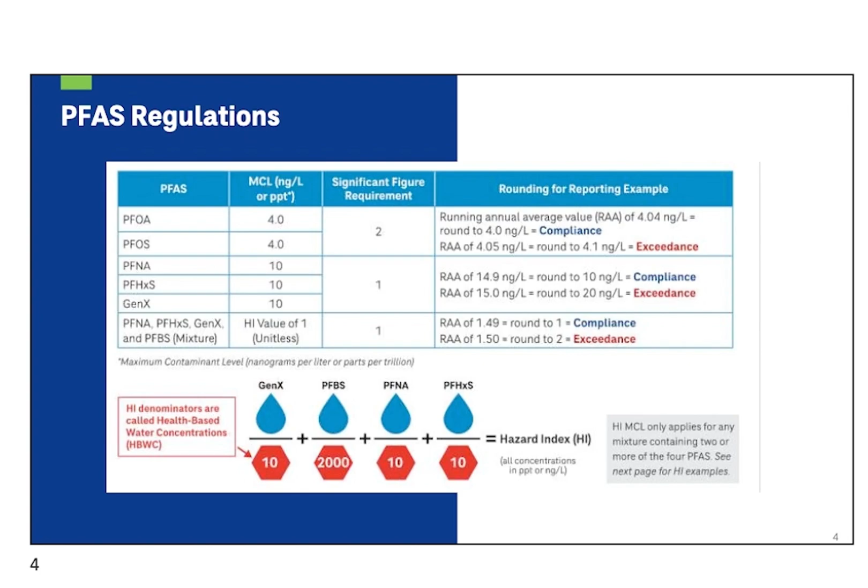So it's quite different. And then they also have a hazard index, which is explained in the figure at the bottom of the slide, where they take the concentrations of 4 compounds and divide them by their health-based water concentrations and add them up, and that has to be less than a value of 1. The significance of that is they're going to keep adding compounds in the future. So you can expect that in 20 years from now, there'll be quite a few more of these PFAS compounds regulated by adding them to this hazard index.

But for right now, the most restrictive aspect of this regulation for you is PFOA and PFOS, as we'll show in just a minute. Next slide. So this is your data for raw water, untreated water, before you've added any powdered carbon. You all do take out some of the PFAS already by adding some powdered carbon.

But your raw water, as shown both graphically on the right and with numbers on the left, exceeds the limits that will be effective in 2029. So you're not exceeding anything right now, but in 2029, you have to get down below 4 for PFOA and 4 for PFOS, whereas they're currently at 10.2 for PFOA and 26.1 for PFOS in the untreated water. And you can see that graphically on the right.

The limit of 4 is shown with the green dashed line, and the bars going up are your concentrations. The upper graph is for PFOS in nanogram per liter. And you can see it hovers around 20 to 30 nanogram per liter for PFOS in your source water, whereas it hovers around 10 to 12 for PFOA. So you need treatment. Next slide.

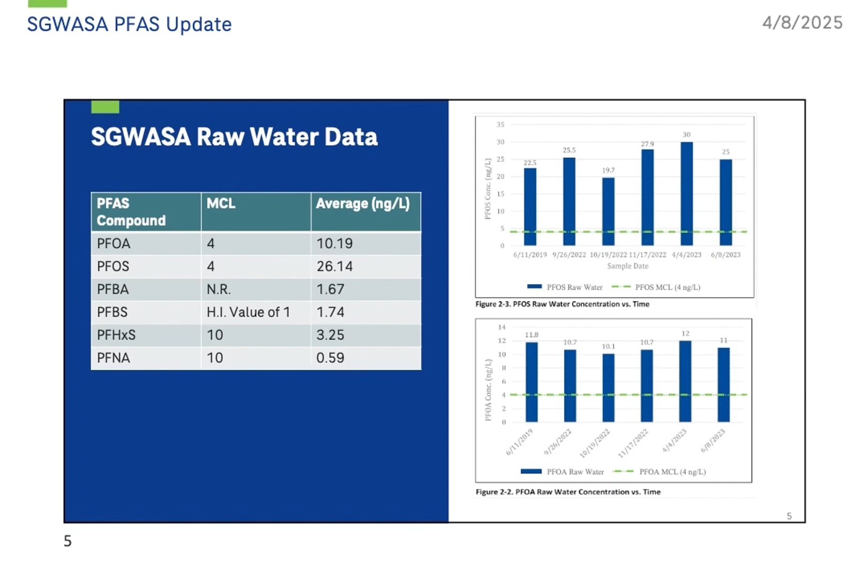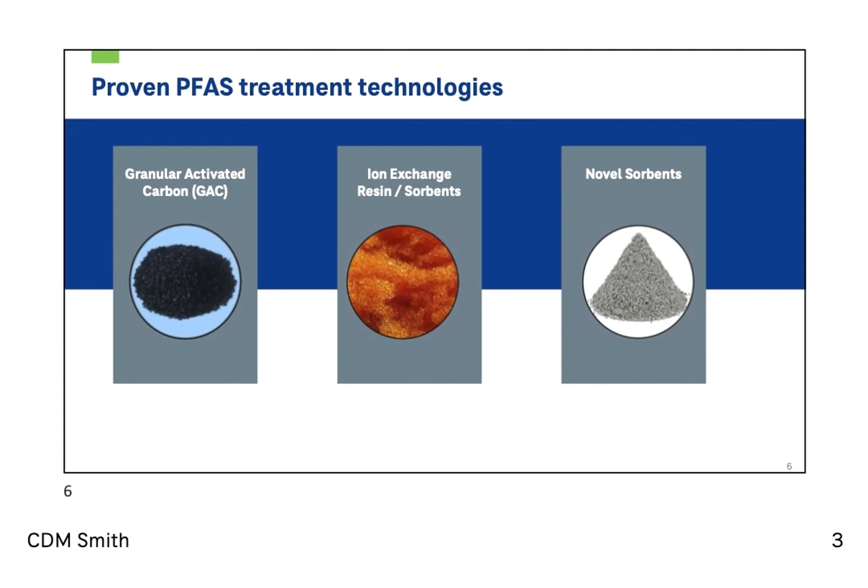So what treatment technologies work? Well, granular activated carbon does work. You already add some powdered activated carbon to your raw water. Granular activated carbon after your filters would work quite well. Some plants have that already, as I'll discuss in a moment. But granular activated carbon could be added at your plant with post-filter contactors. And that is what we're pilot testing right now.

We are also pilot testing ion exchange because that can work and sometimes be more effective, particularly for short-chain compounds. So we'll compare those when we get enough pilot data to make conclusions. We're also looking at novel sorbents, which are fairly recent, hence the name novel, discoveries of ways to remove PFAS compounds. The novel sorbents work pretty well for the long-chain PFOS and PFOA, not so well for the short chain. So we'll summarize all that in the report and make recommendations and compare them in many ways, including costs.

We cannot compare O&M operating costs right now because we don't know how long they will last. That's what the pilot testing tells you. How long will it last? Next slide.

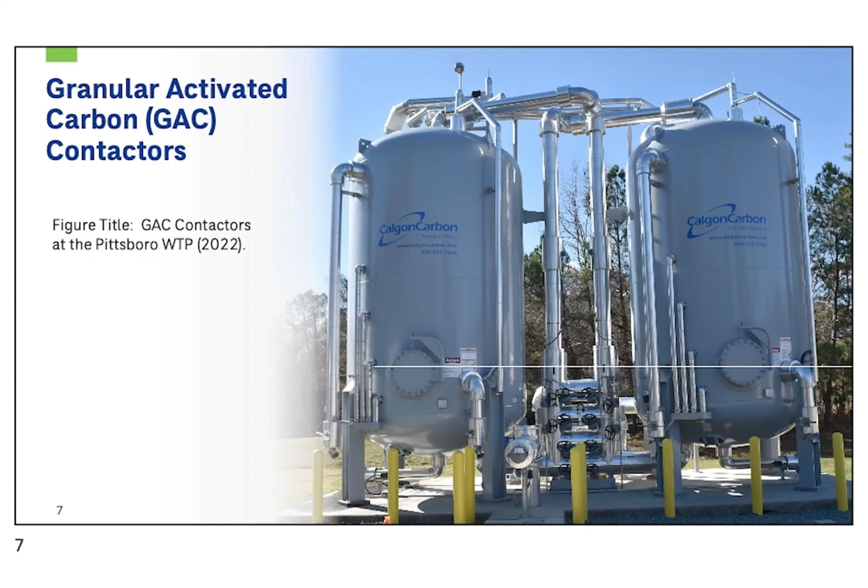So at Pittsboro, as an example, I mentioned that some plants in North Carolina already have this technology. Pittsboro had high levels, like many in the Cape Fear Basin, high levels of PFAS. So we already designed, built, implemented these GAC contactors that you see. These are in operation, and we did the design and construction and startup operations, and it's working very well. These are with GAC, but we designed these where they can actually work with ion exchange and novel sorbents also. It's the way you design the internals of the contactor.

Can I ask a question? Yes, sir. What are their current numbers? Oh, they can meet the 4 and 4 right now. Good question. Yes, what is their daily output of water compared to ours? Yeah, so Pittsboro averages about 1 MGD. If you want one that's larger, Wilmington, way down at the end of the Cape Fear Basin, they're doing post-filter GAC, and they're a larger plant. Thank you. You're welcome.

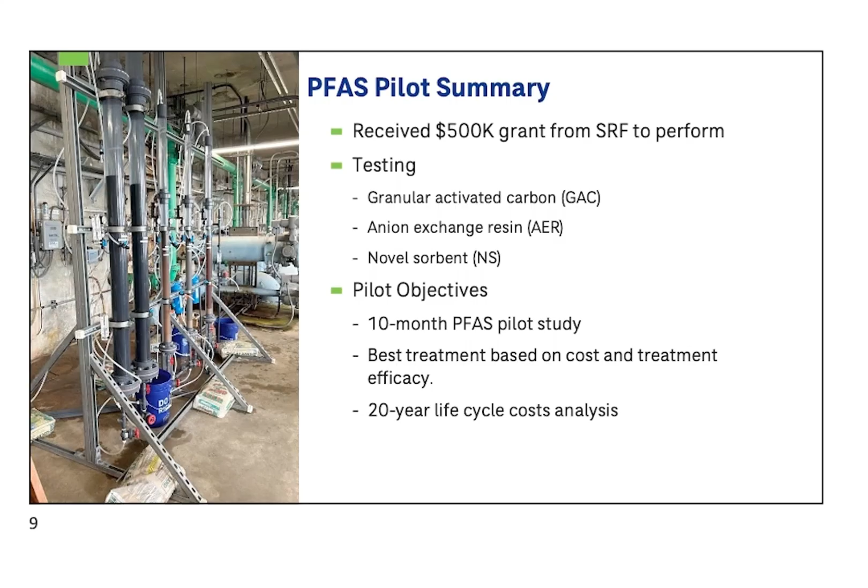And the objective of our pilot is we're trying to run it long enough that we can determine costs. So with any type of removal technology for PFAS, we use a media. The media adsorbs the contaminants, and then it becomes spent. As an engineer, we want to determine how much we can absorb in a certain amount of time before media change-out must occur. And that's what's going to get us the best life cycle cost.

So every water source is different. The water chemistry changes per your source, through your distribution system. So we want to make sure we're getting it right. So the state allows the pilot study, which allows us to determine the best treatment based on both cost and efficacy.

I have a quick question. The media would be the compound that you're using to purify the water? Correct. Yep. So the media, in this case, it's the GAC, the exchange resin. What happens to that when it's used? That's a great question. So the GAC people, sometimes you can return it to them, and they will remanufacture it to be reused somewhere else. And most of the time, the other stuff is typically landfilled, incinerated, other items. But there is a waste product associated with media change-out.

Like lithium on solar panels. Yeah, exactly. We're all going to have to deal with it. Okay, thank you. And landfills are challenged with the same type of PFAS removal that we are, on a different level. So that's the pilot.

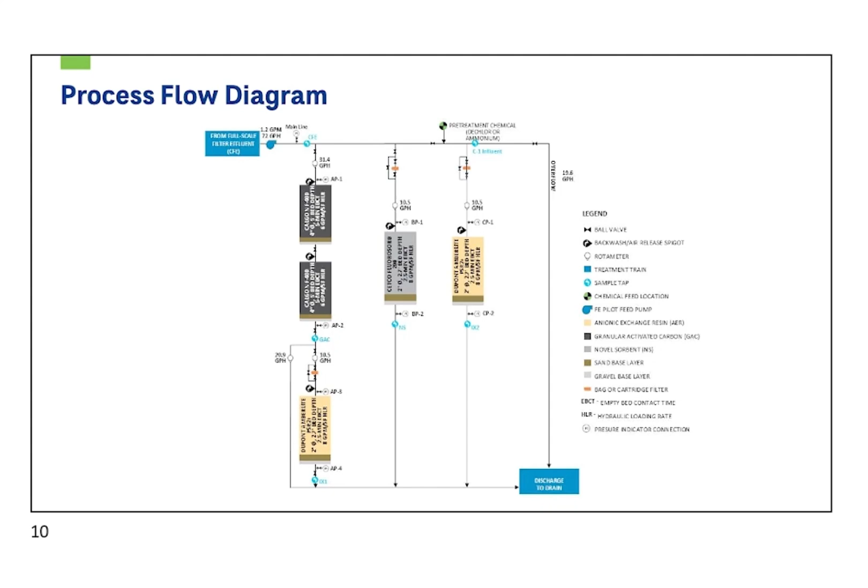Otherwise, we have to calculate how far under the MCL we need to be to make sure we change out that media before it creeps over. So you might only get 90% of your media use. The lead-lag configuration has a higher capital expense, but a lower operating expense. So when you do the 20-year life cycle and you compare lead-lag to just a lead vessel, you might find out that it is affordable and it is something that can help you. And if it's not affordable at this stage, there's ways to plan for it in the future.

All right, next slide. So this is what I mentioned before. We were up and running October 2024. And I really want to reach out to Scott and Chris, and especially the plant staff. When we set up a pilot, it's not only dependent on us, the engineering firm, being out there ensuring that it's running correctly, collecting samples and equipment, but there's a daily task associated with this.

I mean, for a successful pilot, it has to run. We have to check it every morning, afternoon, evening. And we want to keep the cost down. So instead of us being out there every day, the plant staff has been really great. They've done a great job recording data for us, and helping us out and making this pilot successful.

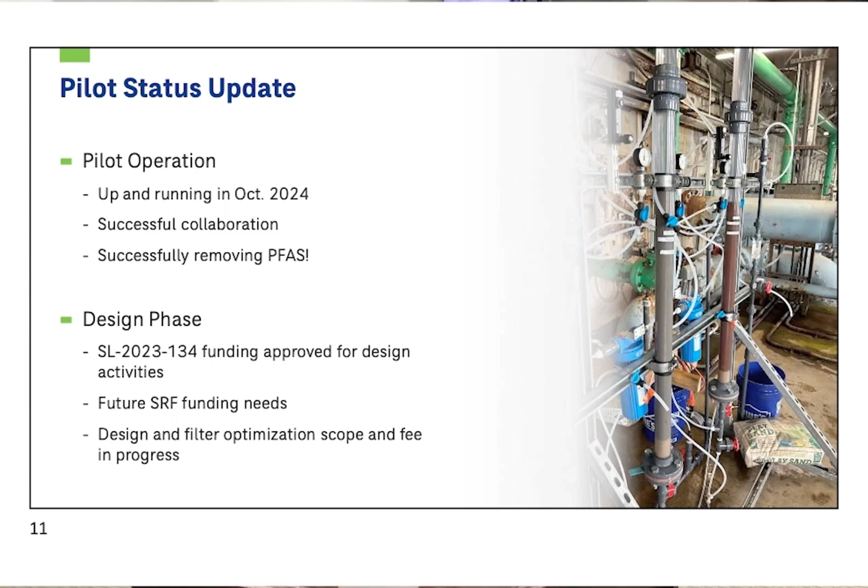So that means that $500,000 grant we received from the state is being stretched over that 10-month period. And so it's really good collaboration. Really happy to report that. And the best thing about the pilot is we're seeing successful results in all three medias right now. And then, the next phase, we have to get enough results to start the design phase.

So we're getting close. I believe we're going to take another round of PFAS samples this week. And based on that, we'll get results in May. And we're going to have an interim report for Scott and others, either end of May, beginning of June. And that's going to start leading us to some preliminary treatment selection. And then we're going to run that all the way through the end in October.

And then come November, we're going to have another presentation to the board that says, this is what the pilot told us, this is the results of the 20-year life cycle, and this is the technology we're recommending as the engineer to Seguasa. That was November, correct? Correct, yeah. And it's next slide. I think I jumped the gun, so next slide, there we go. That's quizzing you. So there it is.

So we're going to summarize all this in a pilot report. So we have to submit the report on October 19th to the state. That's one of the grant requirements. So once that report's complete, it will be available to the board and other members. And we want you to have a chance to review it, and then we'll set out the time, next board meeting, to review those results. Next slide.

So this is the good part. This is the presentation of PFOA. As Bill mentioned, the critical parameters we're watching are the PFOA and the PFOS. So you can see that actually the raw water concentrations are starting to trend downwards. I think as people in the industry and the state, we're removing PFAS point sources. Industries are polluting less. So we're seeing those concentrations go down, but not away.

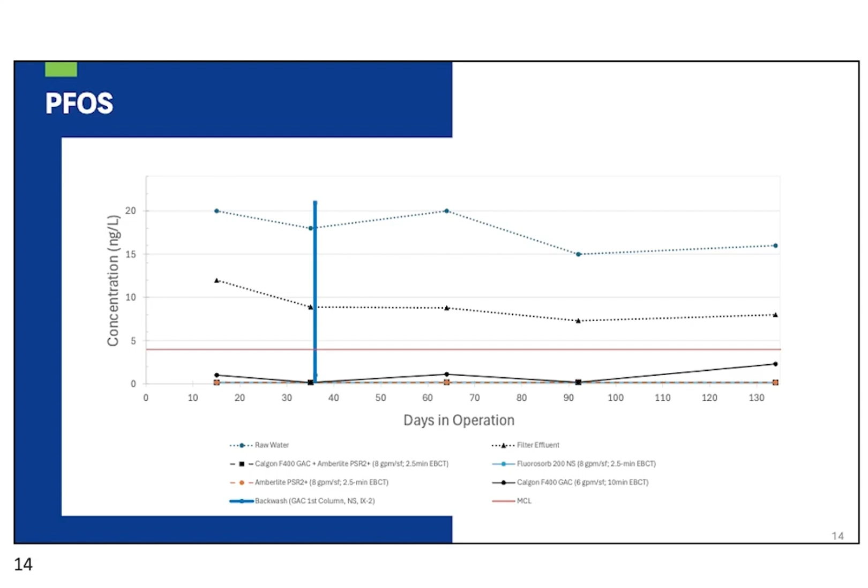We're trying to see if there's any advantage that Amberlite lasts longer if you have a GAC that takes the front hit. So you were saying that the media goes to either be recycled or it can go in a landfill. If it goes into a landfill, doesn't it affect the groundwater and cause more PFAS? Correct. So landfills have their own challenges, right? Landfills are capped and lined, so they contain the water, and water is removed, and they have their own treatment systems, and they are tasked right now with the same, trying to remove PFAS. Okay. Just want to make sure we weren't giving it to them and starting this all over.

Right, yeah. And that's what's interesting. New technologies are developed every day. And that novel sorbent, they're actually using, not in landfills, but for groundwater remediation as well. With plumes going through, instead of putting the media in a vessel, they're building walls in the ground that help knock it down. That's completely out of this picture, but that's something we're seeing in the engineering world.

I appreciate these two charts, the one before this and this one, because it does show that there is progress being made, and we're not just up here saying things are being done, but now we can see that it is, and it's quite amazing. Absolutely, yeah. And we're in month 6 out of 10 of our pilots. So we're moving fast, and for us as the engineers, we see Seguasa and their willingness to make sure this happens fast.

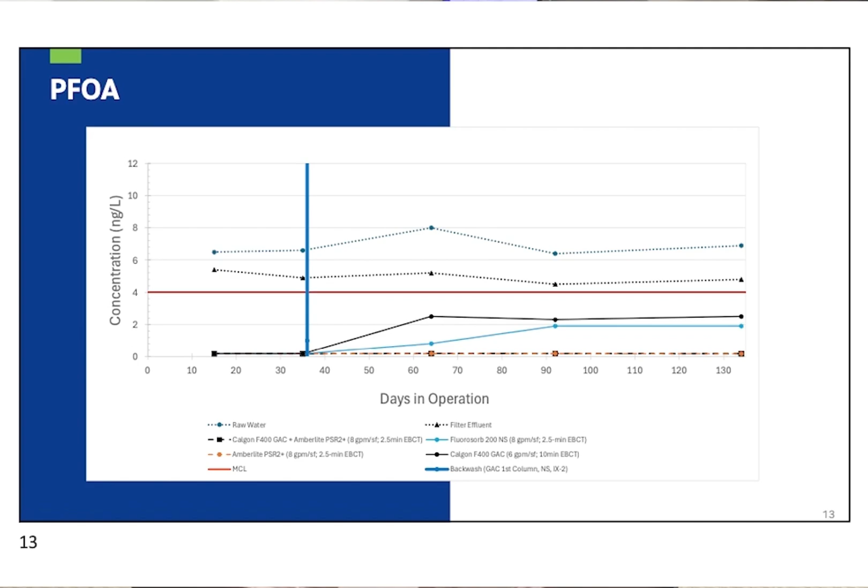But when you look at capital costs, GAC media might be less expensive than the ion exchange media. So when you start looking at life cycle costs, ion exchange can become a better selection if you can get it to last longer. And that's what Bill mentioned, the point of designing these vessels not for one media, but for all 3. Because as things change in the future, they add more components, short chains, things like that. It allows you to start analyzing different types of media, and it gives you the option to change to what best fits.

So going back a few slides to Pittsburgh's system that was designed and is currently in place. Correct. How often does the media have to be changed out in their system? I know, like you said, all systems are different. All systems are, based on the area that they're in. Pittsburgh went over a year with very low levels before they had to change one of them. Every job is site specific. So your numbers you'll hear once we have the results in for the pilot test. But very favorable results in their case.

What was the construction time? We built what you see there in less than a year. We went from 60% design to online. Can't guarantee that until we study your job, but that's what we did there. That was through an alternative delivery, design-build versus design-bid-build. So it allows you to accelerate the schedule.

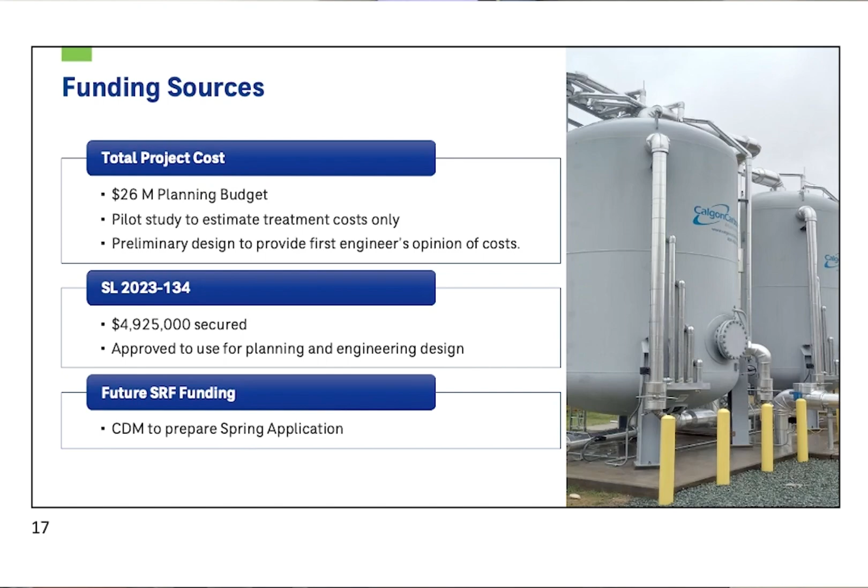But they are a very large version of what goes into refrigerator filters. When you buy a refrigerator filter for your LG refrigerator, it won't last nearly as long as this does. It's filled with packed carbon that's been treated, and it removes a wide range of chemical pollutants. So I don't want to oversimplify it. It's more sophisticated than what goes in the refrigerator, but the technology is not all that different. This is just on a much bigger scale.

I'm sorry. It's okay. Totally forgot the question. I don't want to keep going.

Well, if we select a preliminary treatment and we watch it and it gets to the breakthrough point, do we have to go back and select a different treatment again? So all of the technologies that we're testing right now are currently removing substantially, right, most or all of the PFAS. We never say all because there's always some fraction that we can't even measure. So you can't even guarantee that it's 100%, right?

99.9. So I believe you made the statement, everyone will have to have these two big tanks. So everybody that has whatever we decide will have to have these two big tanks. Yes, thank you for reminding me. That's where my train of thought was going. All of the media types we're currently testing, the novel sorbents, the ion exchange media, and the granular activated carbon, will all fit in this type of vessel.

The interior components of it may be modified a little bit between the different selections, but generally speaking, it's the same technology. And we have big picture questions. How are we going to pump it into these vessels? When it comes out, how are we going to control the flow and make sure it gets the right chemicals added back to it afterwards? So there's a lot of design. We don't just pull this off the shelf and plug it in.